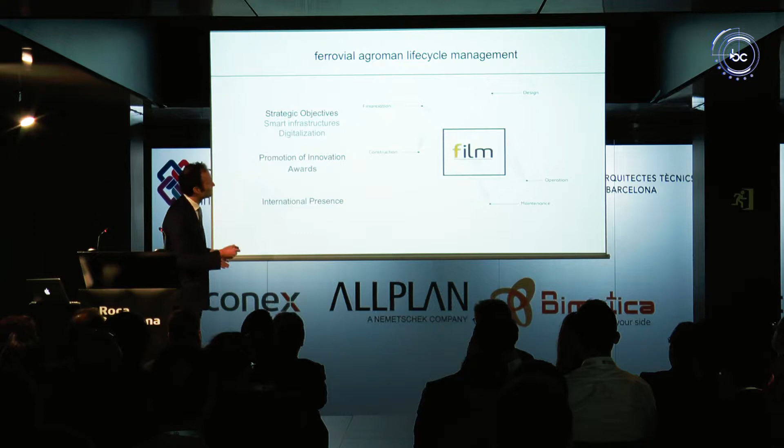Getting closer to the construction division, our strategic objective is about building smart infrastructures and digitalization. For us, digitalization has the face of BIM, and we have created our internal BIM task force that we call Ferrovial Infrastructure Lifecycle Management. This logo is trying to show not the typical easy cycle of a lifecycle where everything looks simple and smooth. Real life is a lot more complex. We do design, but we are building at the same time, we operate, we are in a brownfield, so that's something we need to take into consideration. After all these days of sessions here, you can see the complexity behind IFC, and we need to consider all these phases. Yesterday we had very good discussions about LOD and different stages. It's quite complex, so if all these intelligent people here are able to give a solution to that, that would be great.

In terms of BIM, we put our people on top. It's very clear, and we're going to be talking about our people a lot. Our approach to people is about training, educating, engaging. We start from awareness for everyone in the company, and that increases to what we call practitioner super users. At the end of the day, we are practitioners. So if we go to a project, anyone will be trying to measure something, view a model, take some cost figures, everything. We are practitioners, so we need to engage everyone. If we don't do that, we're going to fail, that's for sure.

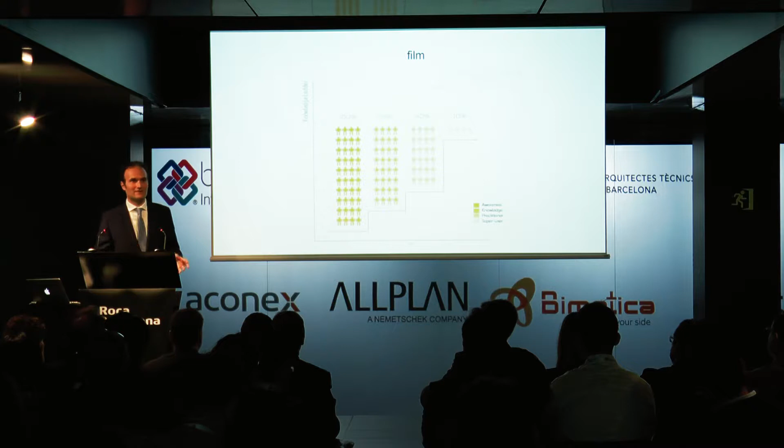So what we are going to present today, we're not going to get into too much detail. We are going to show you new things about 3D coordination, 4D modeling, etc. From the international experience, what we have is a lot of best practices and a lot of learning. Cristobal mentioned before that innovation comes through knowledge creation, so that's what we really believe.

Today Adolfo is going to present the second part, more about cases in Spain, and I think it represents exactly what we are doing. He joined Ferrovial almost a year ago, so we're going to celebrate his anniversary. All the knowledge that we got internationally, we have brought into Spain in a year. We've had a lot of success adapting it to the right projects and to our people, so you can do exactly the same thing that you do outside.

So we say that our people are on top, so health and safety are on top. We are using models, and we don't need to get to the very detail of the models, but we're using them to do the inductions for our people on site. Very simple, so these are just snapshots of the animations, but that's something that we're doing.

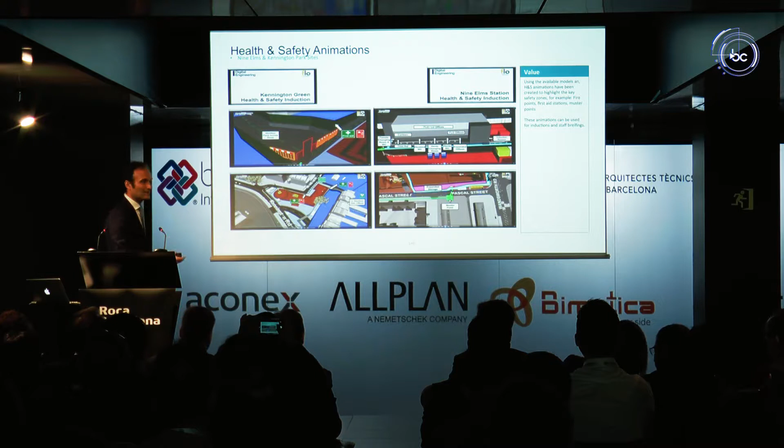And going further, this is a video. Ramon, I'm going to try to compete with you about the animations. These are not marketing animations, these are just animations that we use in our projects.

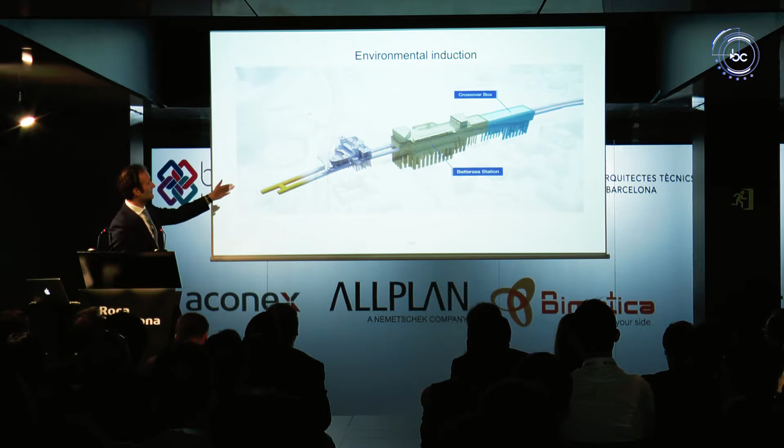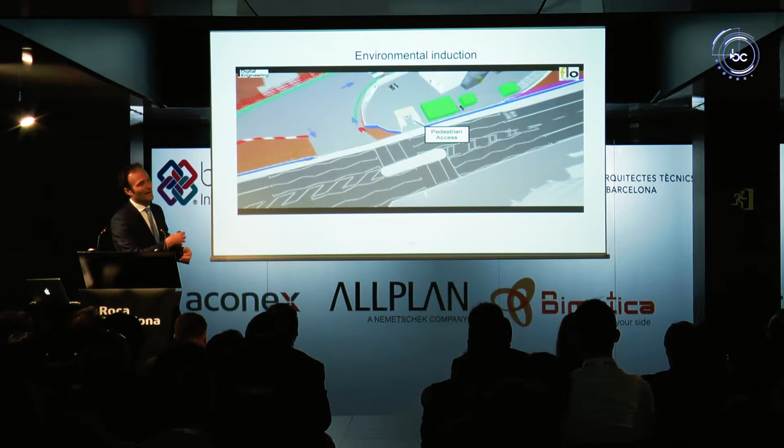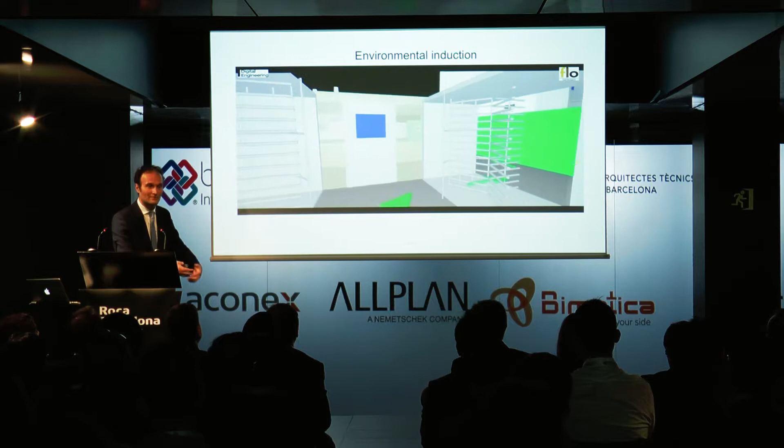This is the extension in London Underground, and this is for environmental awareness. So instead of having a lot of documents, we share that with our people, making use of the models. A lot of effort has already been done producing models from the design, so we take those models and add environmental information, how people need to see or understand, and the things they need to consider during construction.

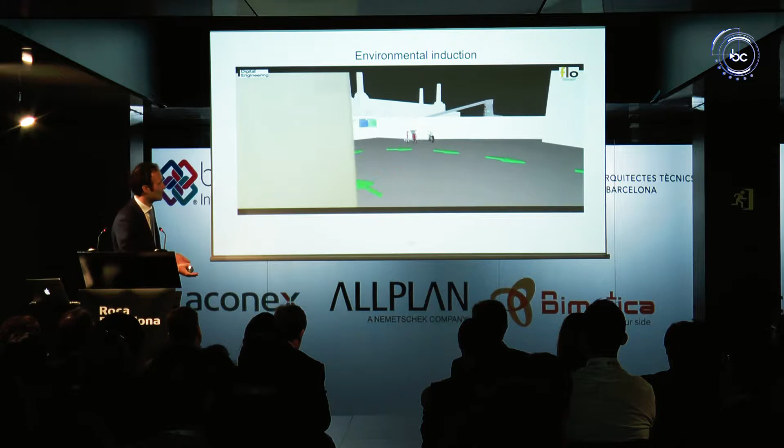Okay, so I'm going to put the whole video, just to give you an idea of what we do. This one, another video here.

This is also a tool used in our projects, and it's to engage our people. This is to explain to our people what we are doing, and we are trying to use new technology. Sometimes technology is not as expected, and sometimes it does, so there is always a combination.

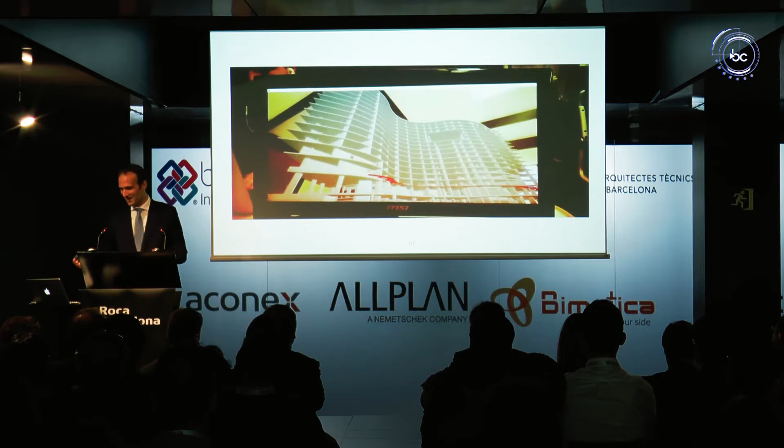I would say it's a push-pull of things that our site teams tell us we need to resolve, or things that we propose and show to them and ask, is that helpful for you? And then I think we always get to nice solutions. You've seen in many places all the smart glasses and these type of things, so that's something that I think is good to attract the attention of our project managers, construction managers, the engineers, etc.

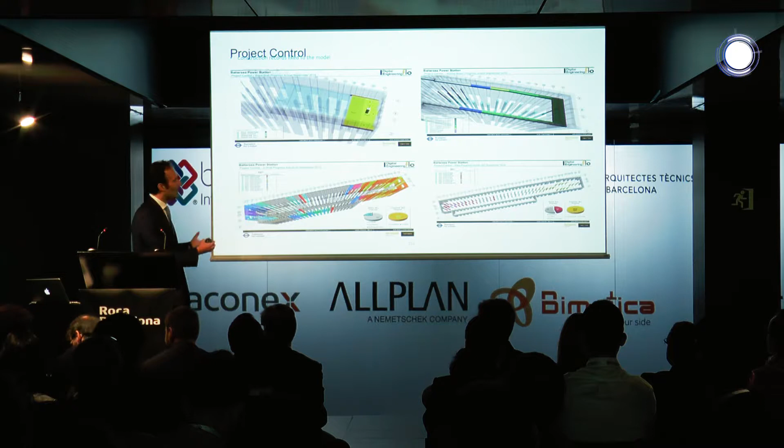Another way, moving from very boring figures in the monthly reports, there is more and more demand from our clients about project controls. So we are moving into visualizing the solutions of how we are doing on program, how we are doing on budget.

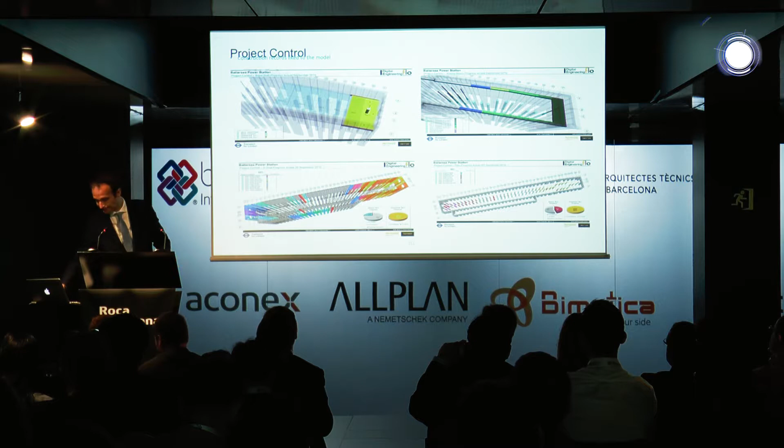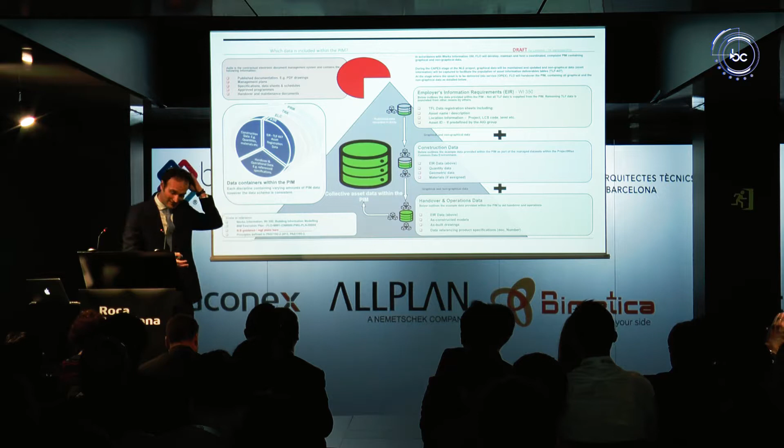So what did I say at the beginning? People. These are the ones pushing us to get to the right solutions, the way to do it effectively. We've talked about technology, people, and always we need to put a slide about process. Behind all that, we need to follow some process, a process that we review with our people. And from all that, we have created a lot of learning, lessons learned, best practices that we pass from project to project.

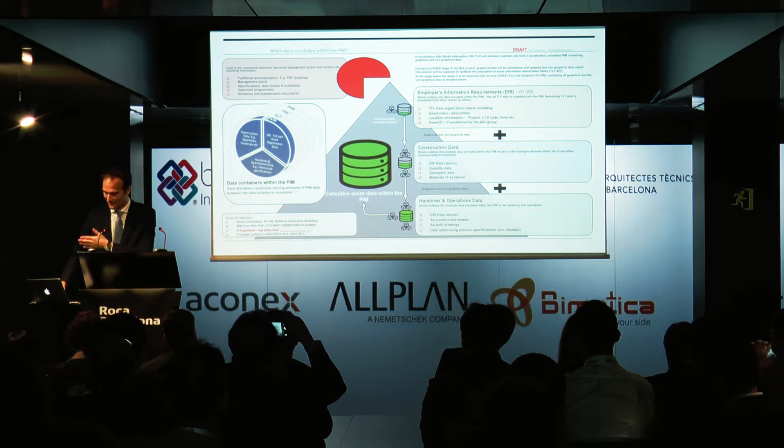And now we're going to move to Spain. Adolfo is going to explain that part, and you can see now in a very short period of time how we are also developing that in our home country. So thank you very much.

Okay, thank you, Ricardo. May I present? I'm the BIM implementation leader for Area 1. We are divided in Ferrovial into 3 main areas, and Area 1 is Spain, Portugal, and South America. So what I'm going to present today is just the Spanish experience that I'm trying to implement in Spain.

Okay, so we have been 3 days at the buildingSMART Summit, and I want to stop for a moment because we have been seeing many international standards, big software companies, huge projects and huge teams. But today is Industry Day, and I want to stop because in Spain we have our companies, our projects, and I think we have something very special in Spain, I think Spain is different.

The projects are very different, the scopes and durations are very different. So I want to raise a question we raised a few months ago in another meeting: what defines a big infrastructure? I think big infrastructures are part of every country, so it's not a big issue in Spain that we build big infrastructures as well. But is it about the cost? Is it about the working team? Is it about the duration of the project? Or is it about the technical issues of the project?

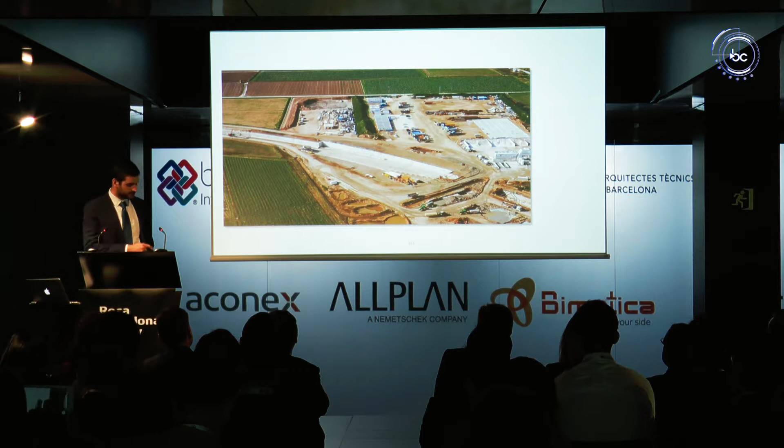Okay, we don't have to move very far from here. If I show you this image, you might not know what it is about, but I can tell you that this infrastructure is a fast train being built in Barcelona that will connect the Prat airport to the center of Barcelona, and we are using BIM here to do better construction and better projects in Ferrovial.

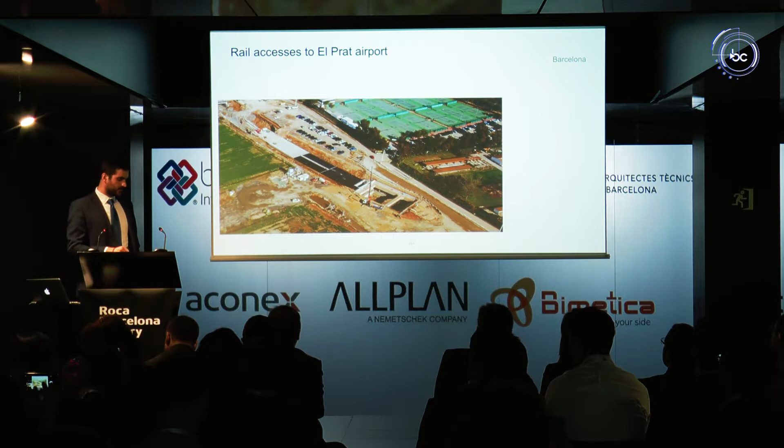This is a big tunnel, about 20.5 kilometers, being built by a tunneling machine. We have to say that in none of these projects do we have BIM requirements - it's just a Ferrovial initiative. But we think, as Ricardo has mentioned, the big key here is the people of our companies, and we want them to learn as fast as possible to get the benefits of this methodology.

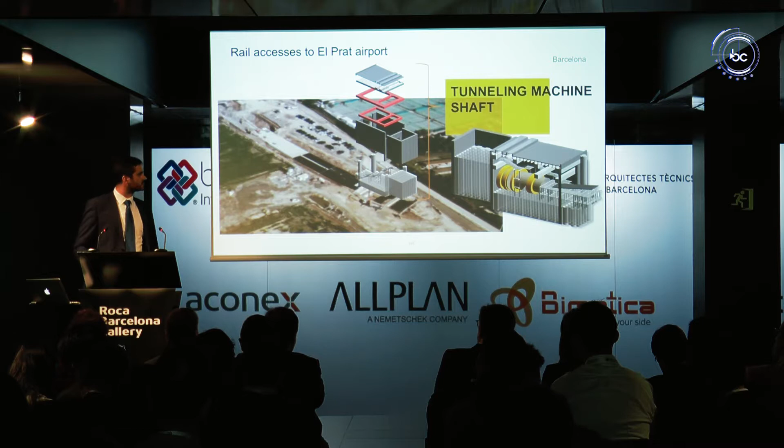Okay, we do not do BIM for just doing BIM. We think that as far as we get BIM requirements in Spain, we want to use BIM for better practices, to do better construction, and to understand how things are getting built on the construction site. So we focus on the main things that we think are special and important in a project. In this image, you can see the tunneling machine shaft, or as Ricardo told me, the launch shaft in English - the place where the tunneling machine is going to start to dig.

As well, in this huge project, we have two emergency shafts that are very complicated to build because the tunneling machine is going to pass some time after the emergency exit is already dug. So we have to be very precise in the construction. Another thing about these civil works is that we have to control a lot of the excavations, the number of meters we are digging, instead of putting horizontal supports to control it.

We are doing the same things that we think, from UK experience, have been important - production control of all the elements constructed on site, or as-built documentation gotten from the elements of the model.

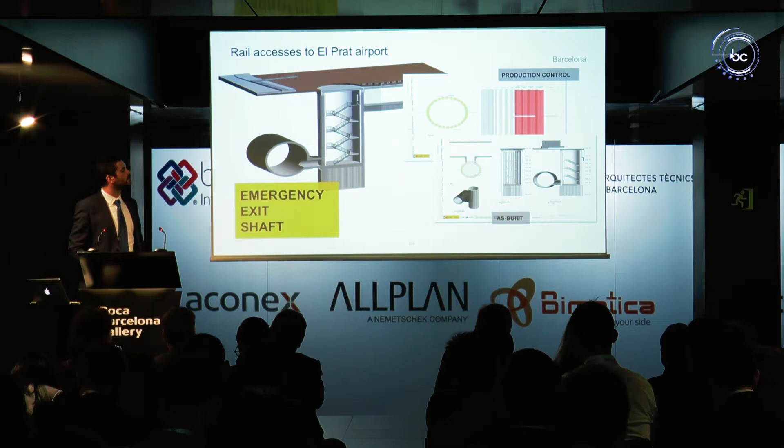As well, as I told you, the project is being built with a tunneling machine. A tunneling machine is a thing like that - we didn't want to be very precise, but many people know about the big head of the tunneling machine, while the backup of the tunneling machine is the big issue about this machine. This tunneling machine has a backup around 150 meters, so there are lots of parts and pieces coming every day before assembling it on site.

So we have a logistics problem when assembling it. All the backup is being stored in the background of the offices, but when we want to start in 2 or 3 months, we want to put all the backup in the facilities enclosure, that is this hall. We have to be very precise in the order of the pieces, because everything has to assemble perfectly before putting the head on the tunnel.

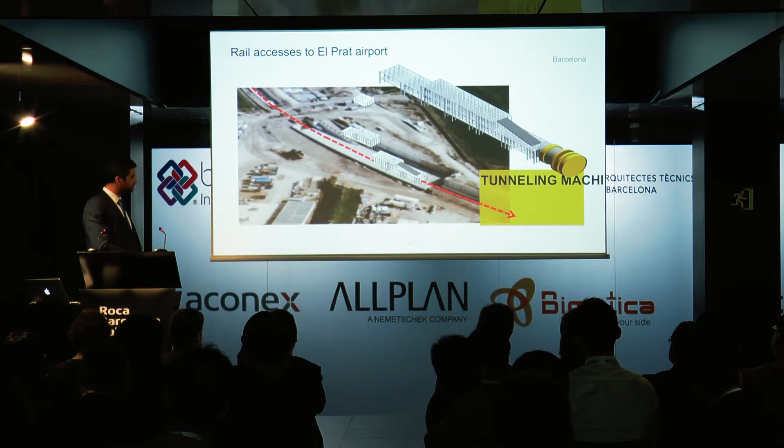Okay, another part of this big project - I mentioned that this is one of the biggest projects being built in Spain by Ferrovial. We have a station being built in the center of the Terminal 1 parking. It's a very difficult place, a very difficult environment, a hard client because AENA is not allowing us to do everything freely. So we have to be very precise, we have to do things right on time, and we think that BIM is being used for that purpose.

Another big infrastructure being built by Ferrovial is our specialist project - we love these projects in Ferrovial. You can see in the name of the company, Ferrovial comes from rail, so we love these rail projects. This is a high-speed project being built in Galicia, the Túnel de Padornelo. Apart from the 8 kilometer tunnel, we have 2 big structures being built there. We wanted to focus on one of the bridges, the Viaducto de Leira, and focus on the key features of construction, because we don't want to talk about just the BIM, but focus on the requirements of our people.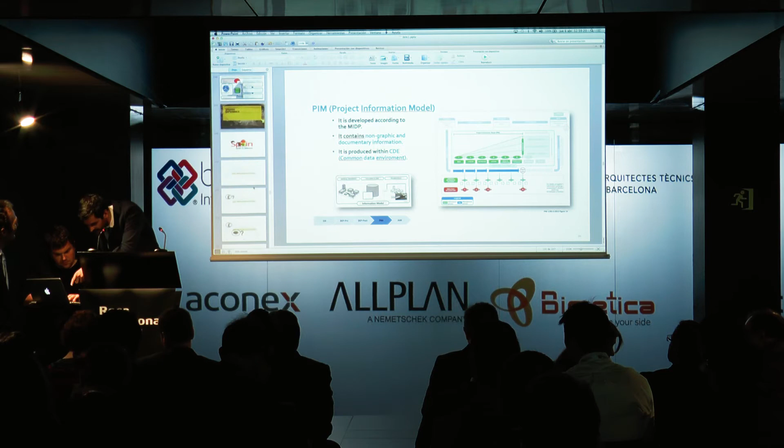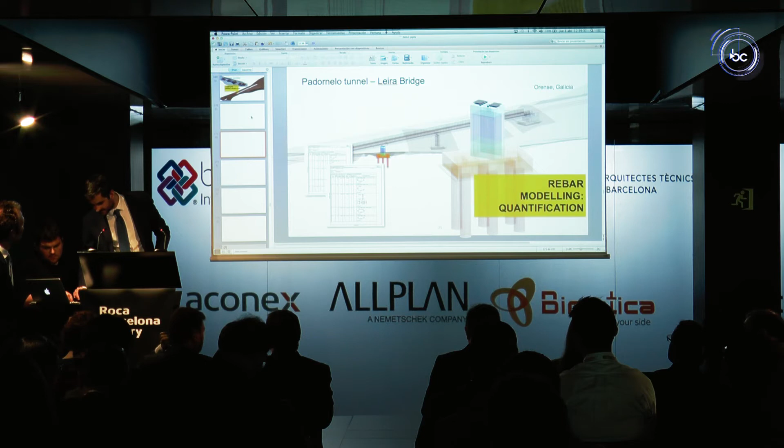Okay, if you don't mind, I will show you this way because I don't know why the white screen is going wrong, and other things are missing in this slide, but okay.

We wanted to focus in - we talk a lot about clash detection in buildings, but what about infrastructures? Do you think it's a good practice to do clash detection in infrastructures, especially in bridges? Well, we think that's a big issue in bridge construction.

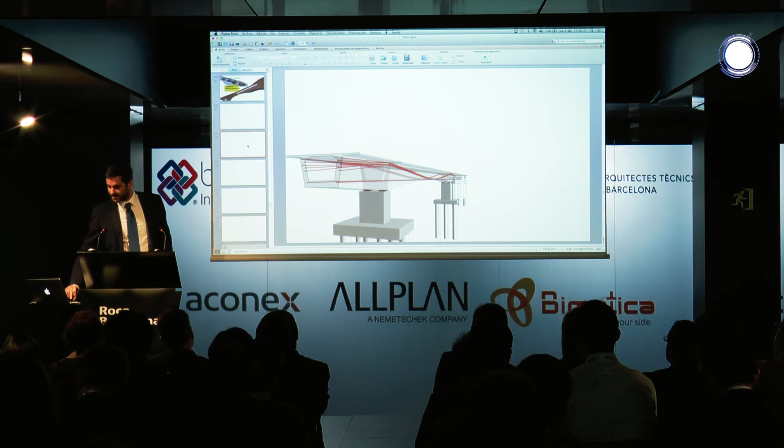The pre-stressed tubes, for example, clash a lot with rebars during the construction. So we thought that doing an analysis of pre-stressed tubes against rebars in the construction site was good practice. Before we start to construct this bridge, we will know in which part of the bridge we will have issues about these pre-stressed tubes that are very complicated.

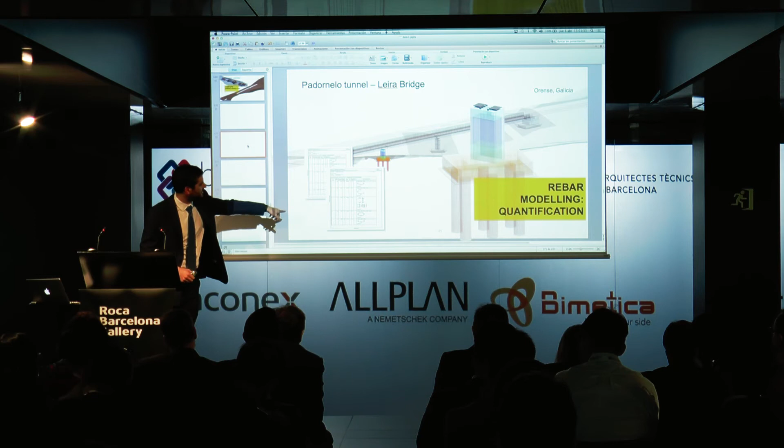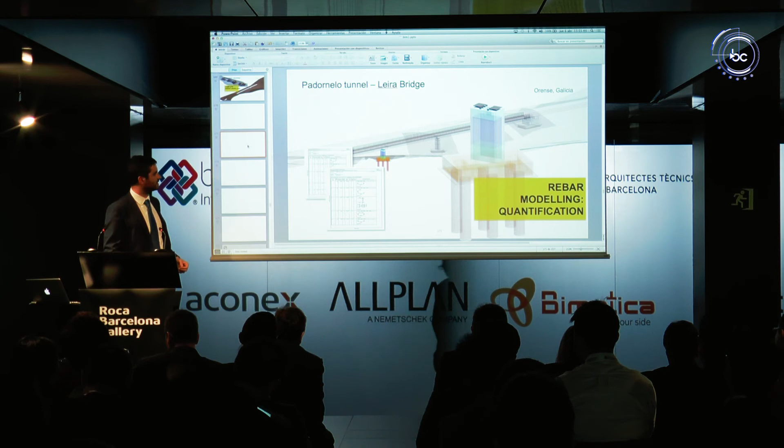Also about the rebar modeling, some people say it's not useful for edification, but what about in bridges? I think we have learned a lot and used a lot this pile, which is what we have detailed more, because we have extracted all the exact dimensions of all the rebars, all the quantification of the rebars. When we get into the detail about the construction, we want to know exactly how much it's going to cost us - these shop drawings about rebars can be extracted directly from the model, so it's a big headache you can take off your head.

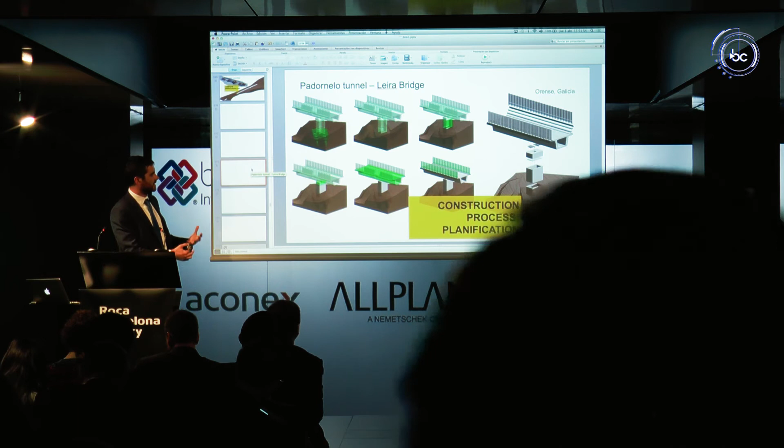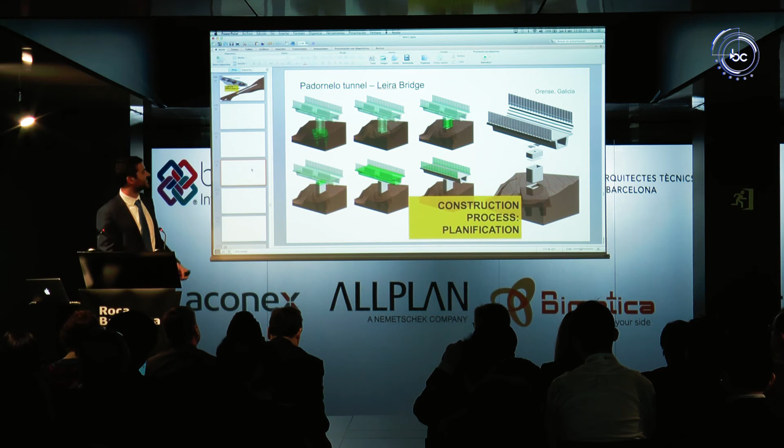Again, in this project, as a construction company, we have to be very precise with cost control and with the documentation we are getting into the BIM model. We are using these graphic softwares because we think the documentation is very accessible for every part of the project. So from a BIM, 2D or 3D slide, you can get all the information about quality, about production, about the technical offices. We think it's good practice.

Again, you mentioned about the procedures. Even when BIM is not required in these projects, we think it's good practice to get the whole BIM execution plan, employer's information requirements, getting the people to know about it, because we will get furthermore benefit.

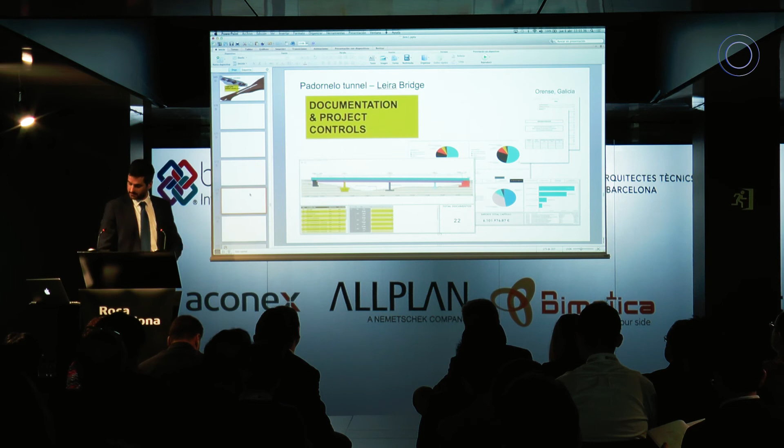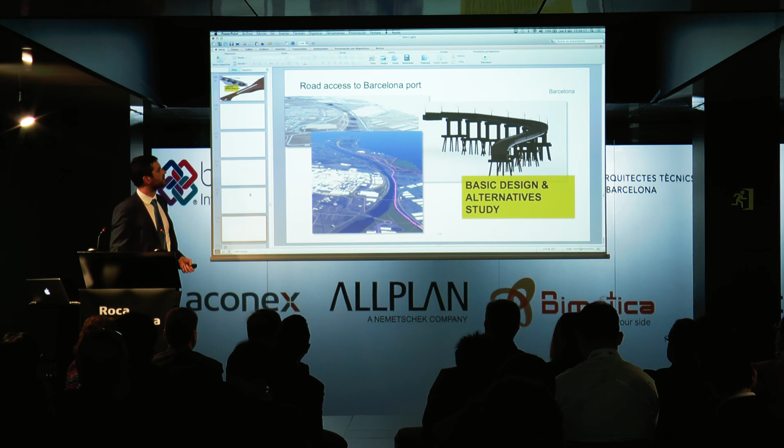Okay, last project about infrastructure - I don't want to bore you. This is a very early stage project being built here in Barcelona as well. It's a parallel project from the Accesos al Prat project, the port accesses, road accesses to Barcelona port. We are using BIM for studying alternatives, so it's not being built yet, but we think it's good practice to know exactly what impact any change of alignment or design is going to produce.

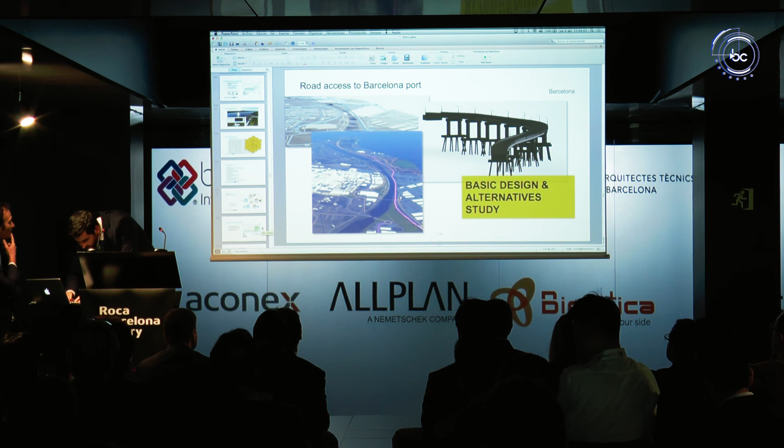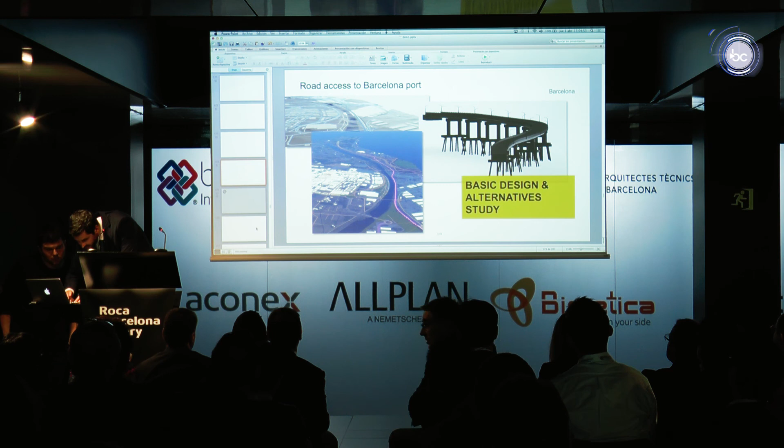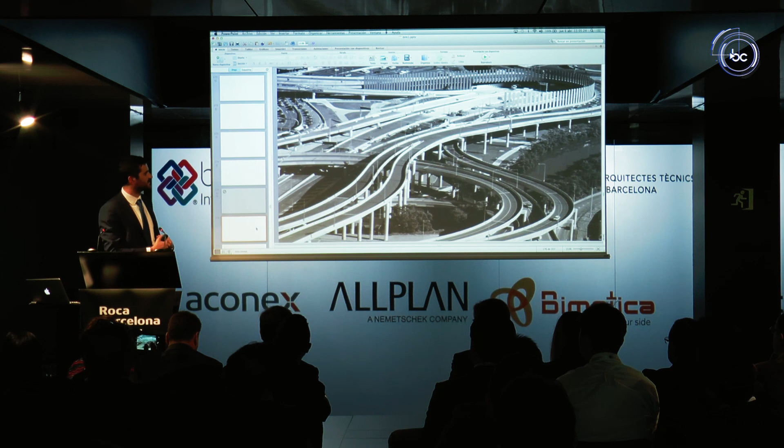So to finish, these are just a few projects - about 20 projects that we are implementing BIM on now in Spain. I think we are moving forward this year, with a lot of initiatives coming from the projects and from our people. I want to mention the buildingSMART standard, the IFC, which as Ricardo mentioned is very important for us for the whole life cycle of the infrastructures we have in Ferrovial. For a construction site, IFC is information for construction - it's not just a standard, but what information we need on site to get better construction. Okay, thank you very much.